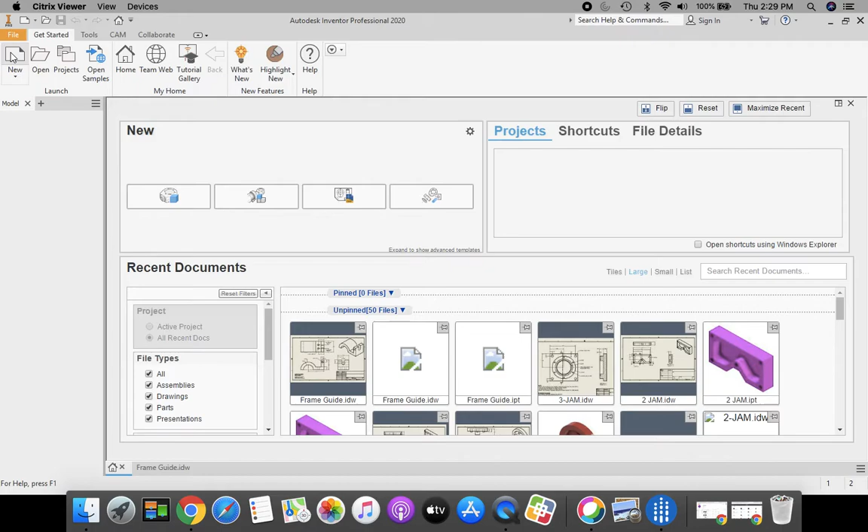Okay, let's begin. Today, to get started, we're going to go up to our ribbon bar at the top, click on New, Standard IDW, and select Create.

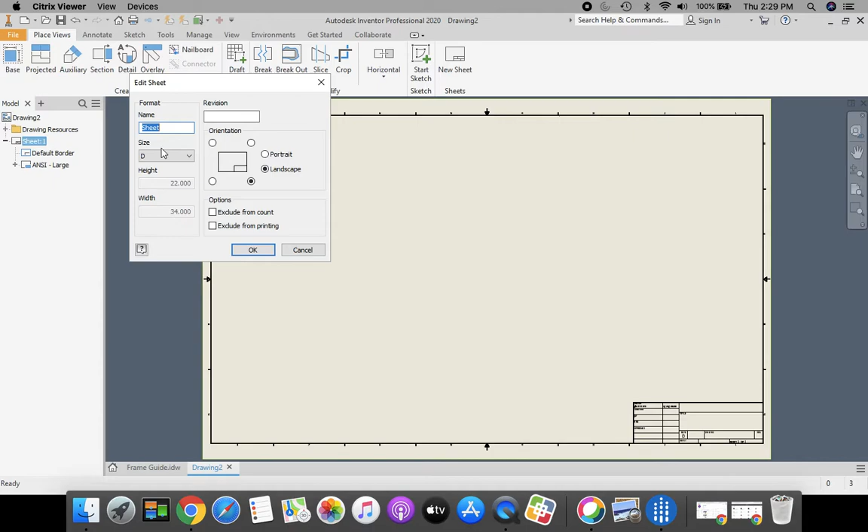Right away we start off with a D size sheet. We're going to change that to a B size. Over in sheet number 1 in our model browser on the left-hand side, right-click sheet number 1, go down to Edit Sheet, change our size from D to B, and click OK.

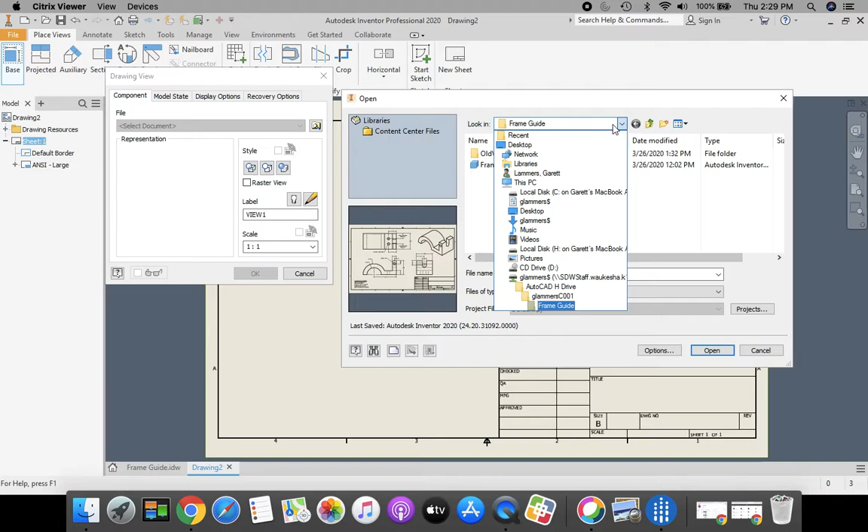Next, we're going to come up to the top in our ribbon bar and select Base. Then go to our Browse folder, the one with the magnifying glass, and go to our H drive, first initial last name C001. If it doesn't automatically show up here, gray box with the green line underneath, it should be all the way down at the bottom. In your H drive you should find your frame guide, and click Open.

Click OK. Now I'm going to take my cursor, place it near my part, and push this over to the side.

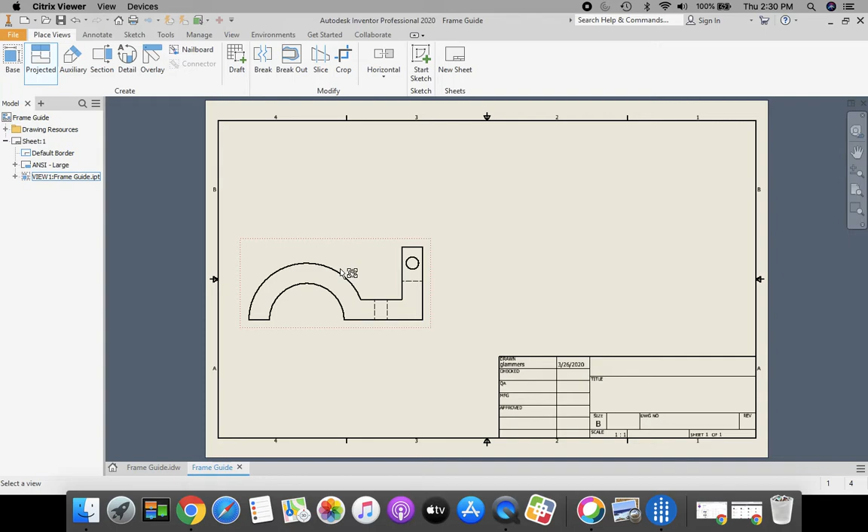Now, in order to get those multi-view top, right, and isometric drawings, I'm going to click on Projected, and click to place a top view, a right side view, and a pictorial isometric. Once you click Projected, if you don't automatically get a part attached to your cursor like I have here, just bring your cursor to the middle of your screen on top of your part, click, and it should automatically attach. Click to place your top view, click to place your right side view, and click to place your isometric view.

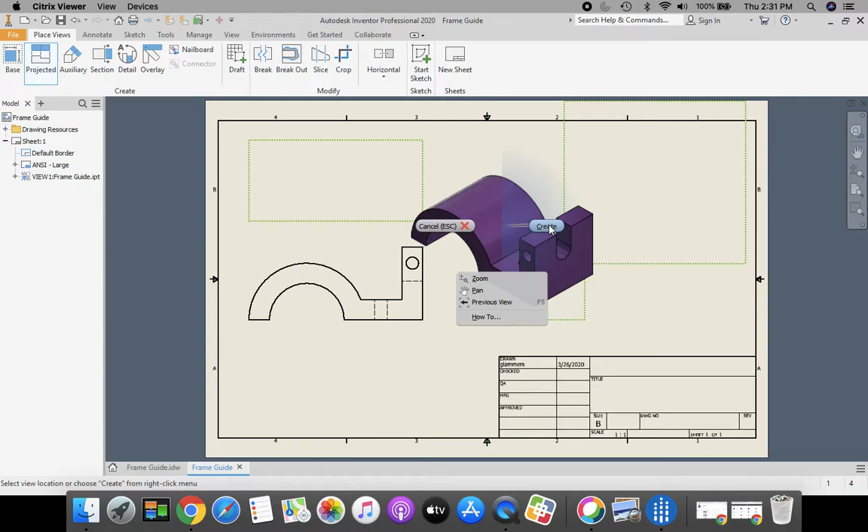Once you're finished with that, right-click and select Create. Remember, if you're using your iPad, you'll probably have to put down your pointer tool and get your mouse tool in order to do the right click. Create. Okay, we're looking good so far.

I think I might pull this front view down a little bit to give me more room. Maybe push my top view up a little higher. Okay, that looks pretty decent.

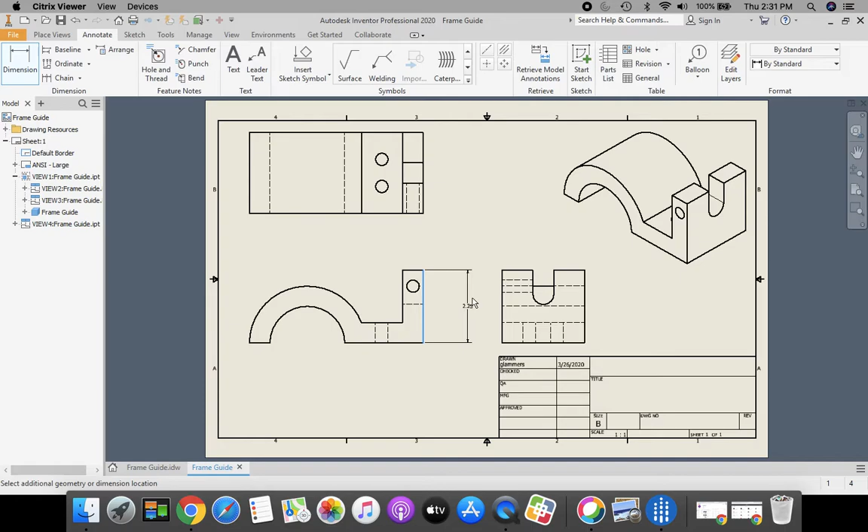Now, for our dimensions, we're going to go to Annotate, Dimension. I'm going to dimension the height of my part. All of these dimensions are directly off the PDF that is in the directions.

Dimension tool. Okay, if it feels like you're working far away and not getting clicked onto the right spot, make sure you zoom in a little bit.

Okay, I don't know if you saw how I did that. Dimension - to get this bottom dimension, I'm going to click the circle, and then click my bottom right-hand corner, and that gives me my 3.5 inch dimension. For my radiuses on these arcs, I can just click on those and bring them out. It automatically defines them for me.

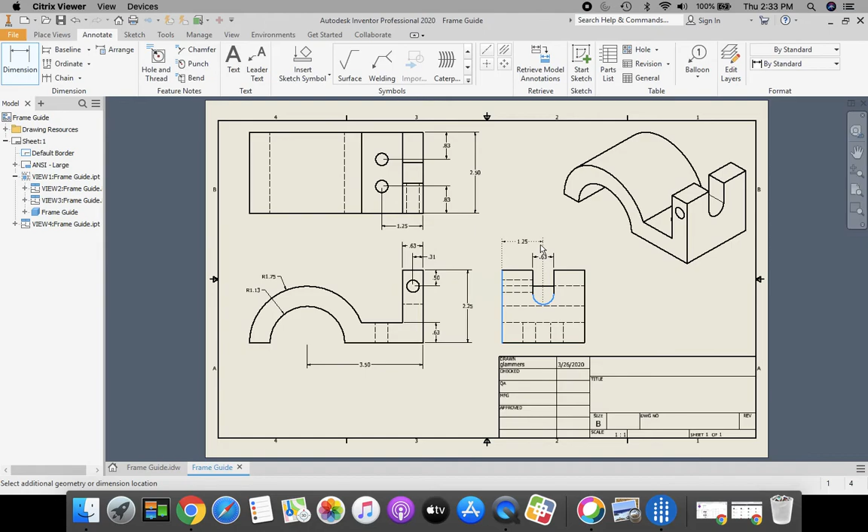Let's see, what else do we have? We have from the front to our middle of the circle. We have from the bottom to our middles. We have our overall dimension from the top corner to the bottom corner. What else do we have? We have a dimension across this slot, a dimension to the middle of our circle, and a dimension all the way from right to left.

That looks good. Now we've got a couple holes and arcs that we have to put in there, plus one more dimension. Holes and threads - we're going to click this circle here on the side and bring that out. That looks great. And we're going to do this set of circles up here at the top.

Great job. Now we're going to take and prepare this to get turned into Google Classroom. First and foremost though, we're going to save this.

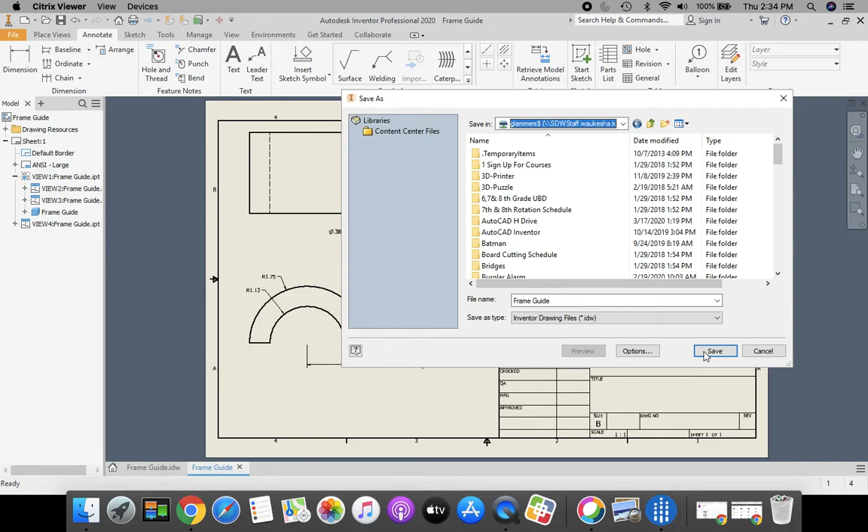Go up to File in the top left-hand corner, orange File. We're going to go down to Save As, and place this into our H drive. If it doesn't automatically open to your H drive, click on the pull-down menu: first initial last name 000, gray box with the green line. Frame guide is fine, we can leave that typed in there, and click Save.

Now let's prepare it to get put into Google Classroom. Orange File once again, go down to Export. We're going to export PDF, placing this in our H drive: first initial last name 000, gray box with the green line underneath, and click Save.

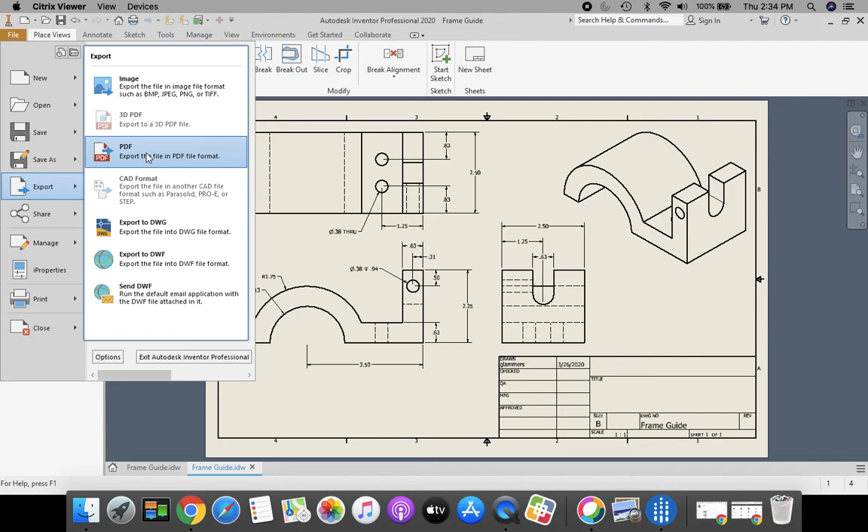Now we're going to make it into a PDF. So orange File, Export, Export PDF, once again into our H drive, and click Save. Okay, now once you have that PDF saved, that's what you're going to turn into Google Classroom.